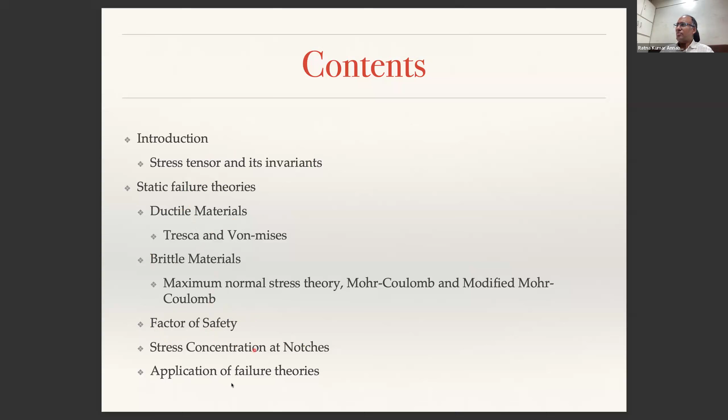So in this, we will discuss certain aspects of the concept of a stress tensor and its invariants, and how then we will define the failure theories, different types of failure theories for ductile materials and brittle materials, and then we will define the quantity called factor of safety. Then you apply these things to components that have stress concentrations or notches. And then we'll see some application of these failure theories for design problems.

Okay, so what is failure? When we say failure, what is the meaning of failure? Does it really mean the complete failure or ultimate fracture of a component, or is it not? And the second thing is, how does one define failure when you are dealing with a ductile material versus a brittle material? Is the definition of failure the same for both? So if you are an engineer, for engineering applications, what do we consider as failure?

The definition of failure itself is important, because depending on the definition of failure, we will be able to characterize, or classify, whether a particular component or system is safe to use or is not safe to use.

And then, are material properties important? Are the material properties that we have discussed in previous classes important in order to assess failure of a component? These are the questions that one needs to ask before we move on to understanding failure.

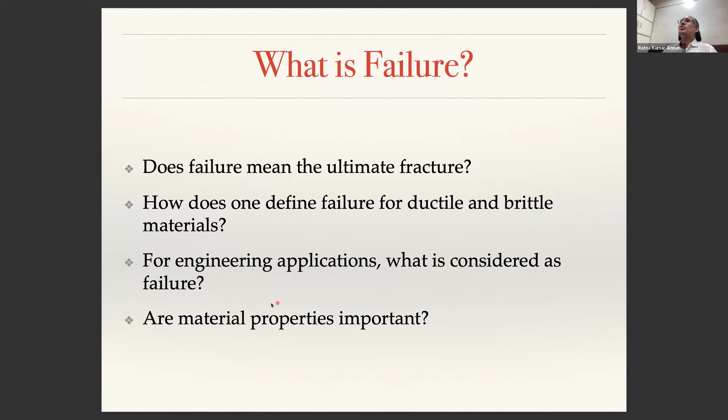First of all, we need to define what is failure. We should understand what is the meaning of failure.

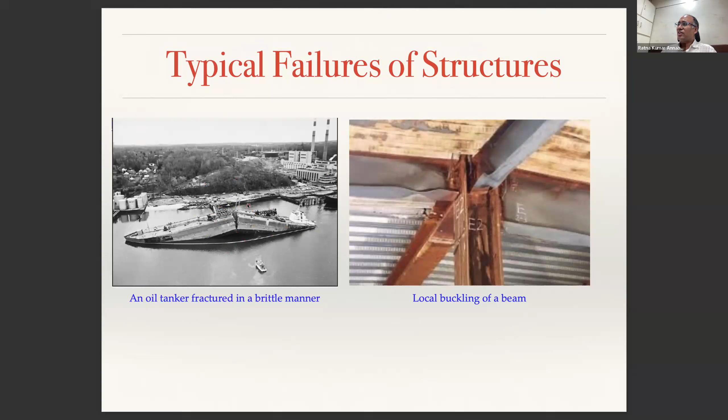So now the question is, why do parts fail like this? Why do structures fail like that? Why did this one only buckle but did not fail, whereas why did this other one actually completely break instead of giving a sign like the one on the right hand side? So the question we ask is, why do parts or components fail?

I think this is the single most important question that contributes to a rich scientific understanding of failure of materials. If we don't ask this question, why do they fail, then we probably would not have understood a large deal about the failure of components.

So from the mechanical engineering point of view, or mechanical design point of view, whenever we are talking about failure, we try to understand the concept of Mohr's circle, and from there we will talk about failure in a little bit more detail.

Okay, so how many of you are familiar with the concept of Mohr's circle? Just raise your hand.

Two. I only see 3 people. Huh? 4. I don't know how to raise a hand. Sorry, okay. So there are only 2 people. There are some people who have lowered their hands. 3 people.

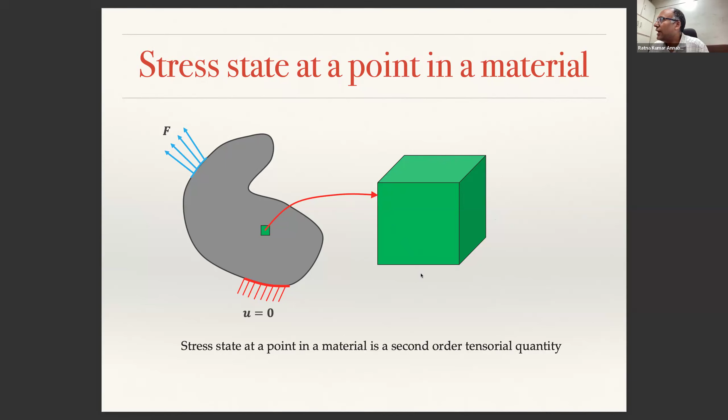This is my infinitesimal volume element. If I look at that infinitesimal volume element, I can show my stress state at that point as, for example, this is your x-axis, y-axis, z-axis. To this plane, the normal to that plane is x-axis. Can you see that? Similarly, normal to this plane is y-axis. Normal to that, the front plane, is z-axis. Is that clear to all of you? Yes, sir. Yes, sir. Yes, sir.

So now, on this particular surface, you will have sigma xx. The first index represents the normal to that particular surface on which you are representing this, and the second index is the direction in which it is represented. So this is sigma xx, what we call normal stress, because it is in the direction normal to the plane. In this plane, the plane's index is x, and this is in the direction of y. This is what we call sigma xy, and this is sigma xz.

These two components represented by green color are in the plane, that is why they are called shear stress components. So you have a normal stress component and two shear stress components. Similarly, in all the 6 faces, you can write them, and you will see sigma yy, sigma yx, sigma yz, sigma zz, sigma zx, sigma zy. Is that clear now?

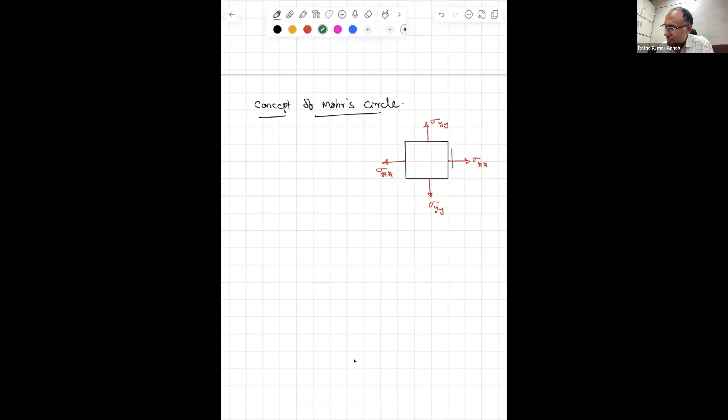We need to introduce the concept of Mohr circle. So if I take a two-dimensional state of stress, instead of drawing a cube, I will draw a square. On that, I'll show that is my sigma xx. This will also be sigma xx. That is sigma yy, that is sigma yy. And that is sigma xy and sigma yx. This is also sigma xy and sigma yx.

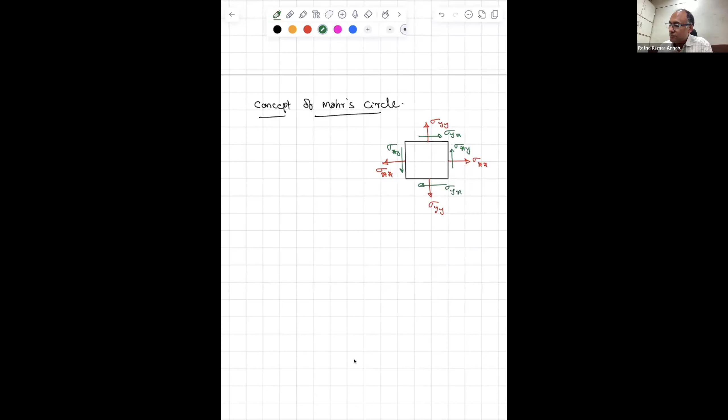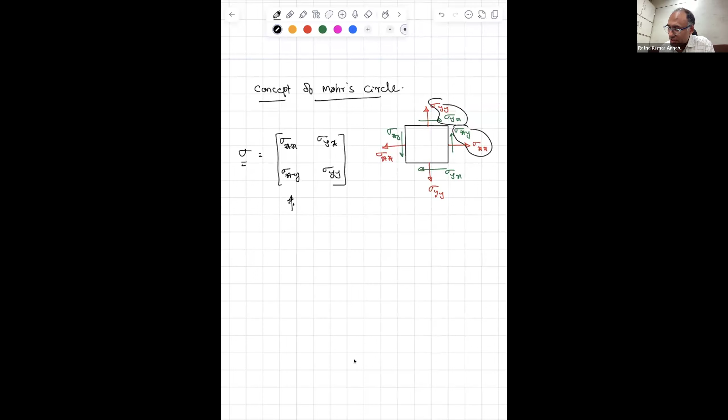So this is a two-dimensional state of stress, represented by a second order stress tensor: sigma xx, sigma yx, sigma xy, sigma yy. Maybe these two quantities are coming here, these two quantities are coming. This is called a second order tensor.

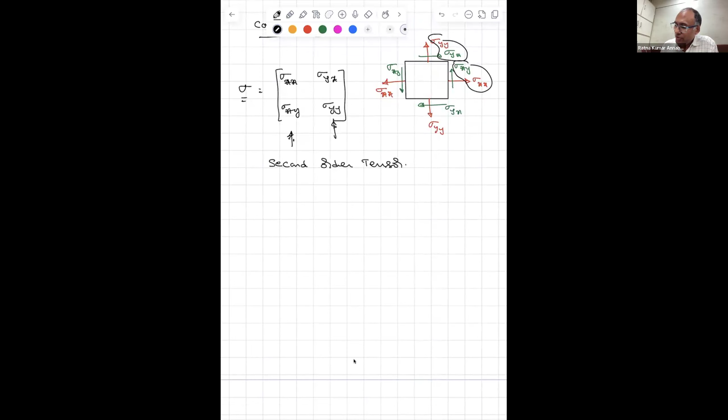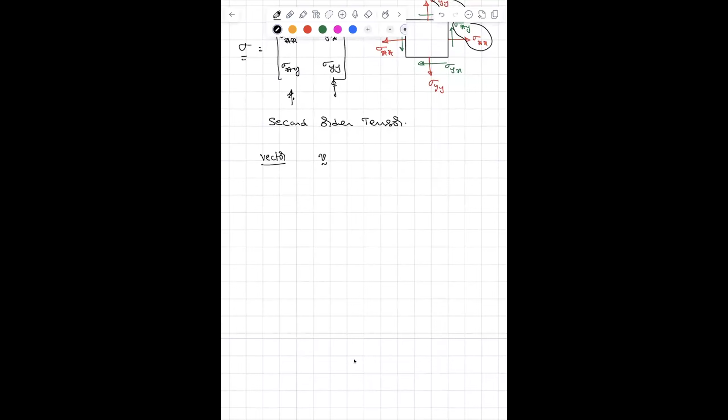What do you mean by second order? Suppose if you take a vector, how do you represent a vector? By magnitude and direction. So let us look at this. Let us say you have x-axis and y-axis. I am drawing a vector v. So how do I represent this vector v? Let us say this is how many units?

And this is 1.5 units, correct? So v can be written as 3, 1.5. Can I do that? Do you agree? So here Vx is equal to 3, Vy is equal to 1.5.

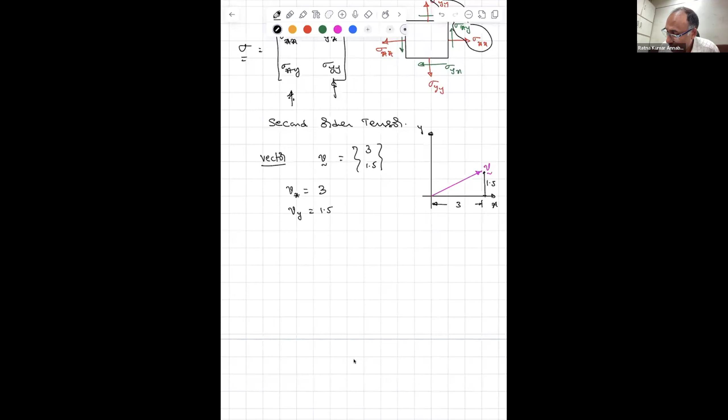That means Vx is the projection of the vector v on the x-axis. Vy is the projection of V on the y-axis. So whenever you are writing a vector, the components of the vector represent the projections of that vector onto the respective coordinate axes.

So now if you look at this fellow, V is 3, 1.5, the magnitude is what? Square root of 3 square plus 1.5 square. And the direction? Theta is equal to tan inverse Vy by Vx. That is equal to tan inverse 1.5 by 3, that is equal to tan inverse 1 by 2.

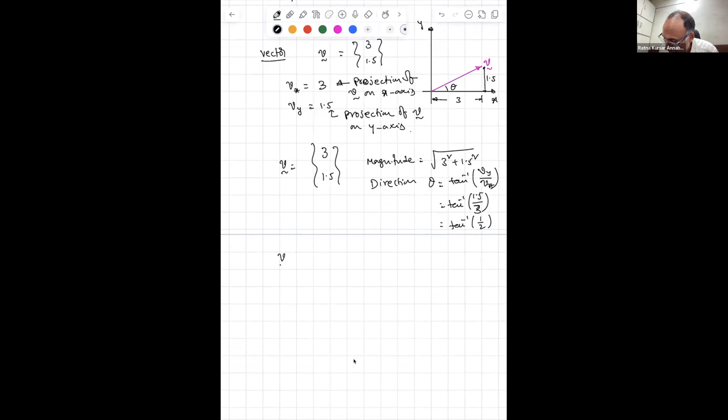Right, so that is how you represent the vector. Now there is another way to represent this vector. This vector will have how many components? 2 components here, because it's a 2D system. So you say V1 and V2. V1 is your 3, V2 is this thing. So whenever representing this vector, I could write it as V, or I could also write as Vi, where i goes from 1 to 2. Can I say that?

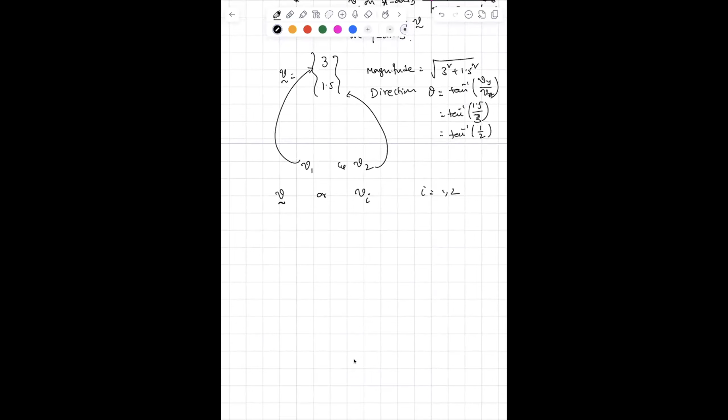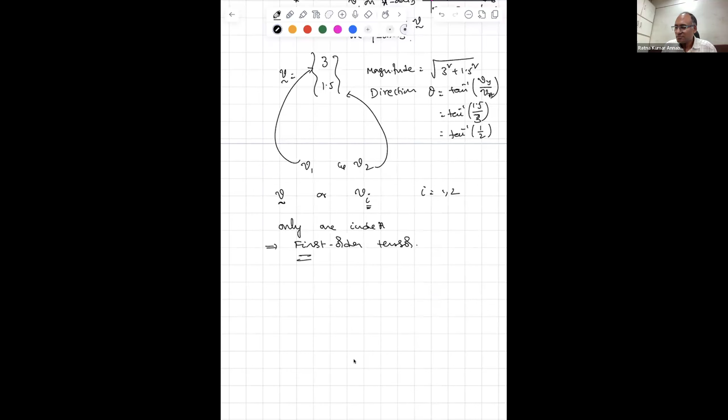Yes, sir. So in order to represent the vector, how many indices am I requiring here? There is only need for one index. That is why it is called a first order tensor, because I need only one index.

Whereas coming to a stress tensor, if I have to represent this guy, I have to say sigma 11 is sigma xx, sigma 12 is sigma yx, sigma 22 is sigma yy. Meaning the particular index value: first row first column, first row second column, second row second column, and so on. So in order to represent sigma, I could write sigma, or I could write sigma ij. Since I need 2 indices to access any element, then that is called a second order tensor.

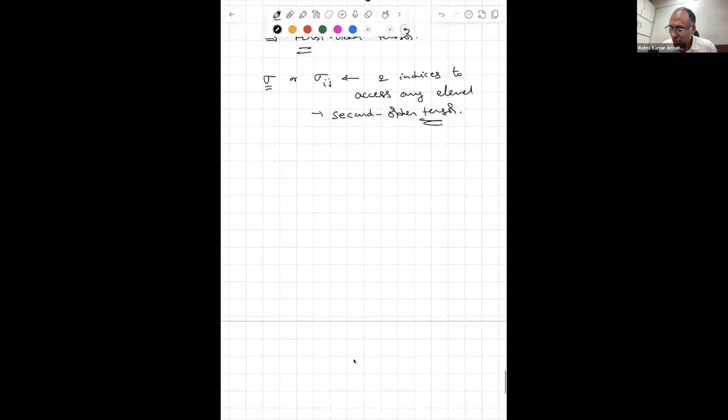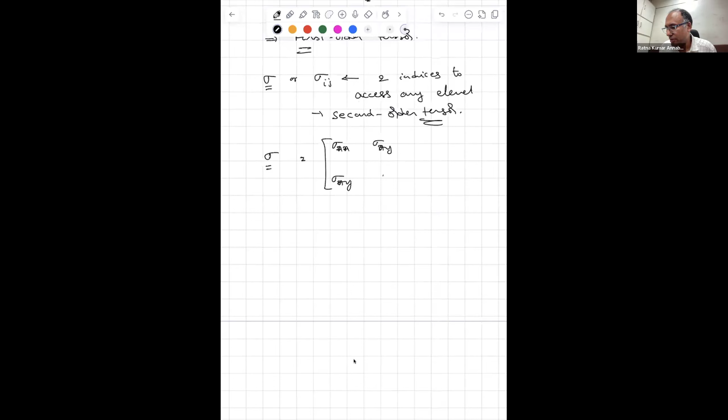Okay, so now you have sigma, which is given by sigma xx, sigma xy, sigma xy, sigma yy. Here xy have written because it is symmetric. Although we have not used that anywhere, but this is a symmetric tensor, that is why sigma xy can be written as sigma yx.

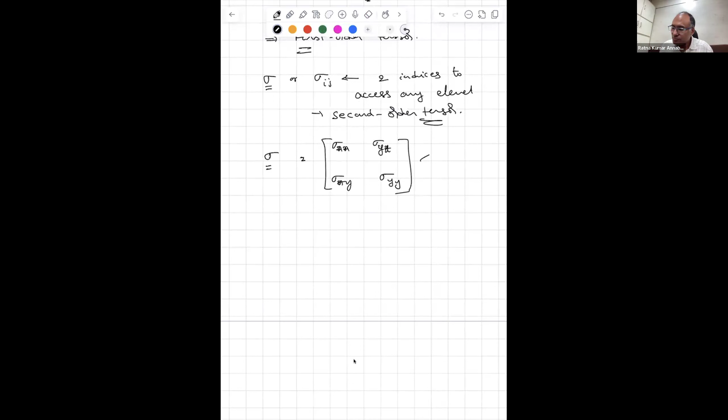Okay, now carefully observe. For this fellow, whatever we have written here, that is our x-axis and that is our y-axis, isn't it? So what is it, suppose if you look at this particular surface...

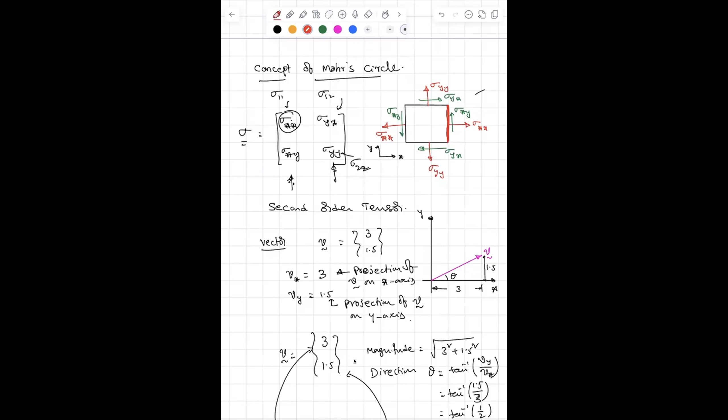What is the normal to that surface or normal to that edge? No, what is the normal vector? How do you represent the normal vector? What is the normal vector to that? X-axis, isn't it? Is the normal in the direction of the x-axis or not? Yes, sir, x-axis. So what is the unit vector along the x-axis? i.

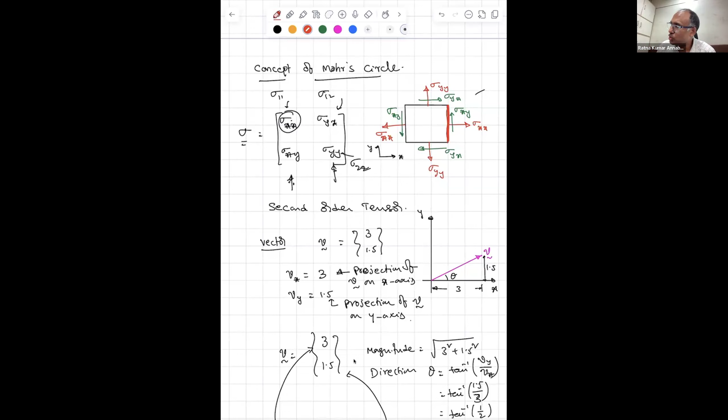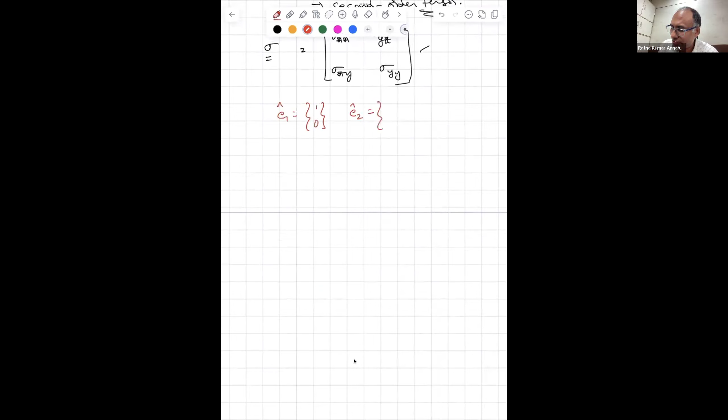Whenever I say vector, it will have how many indices, how many components? It should have, since it's a two-dimensional space, two components. So let us say the unit vector along x direction is E1 hat, that will be 1, 0. And the unit vector along y direction is E2 hat, that is 0, 1. Do you agree or not?

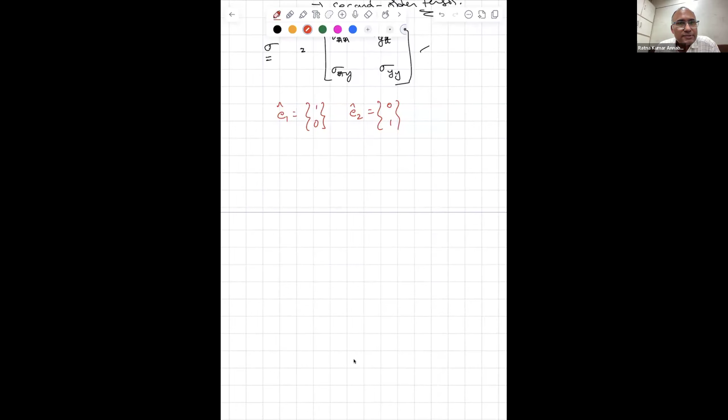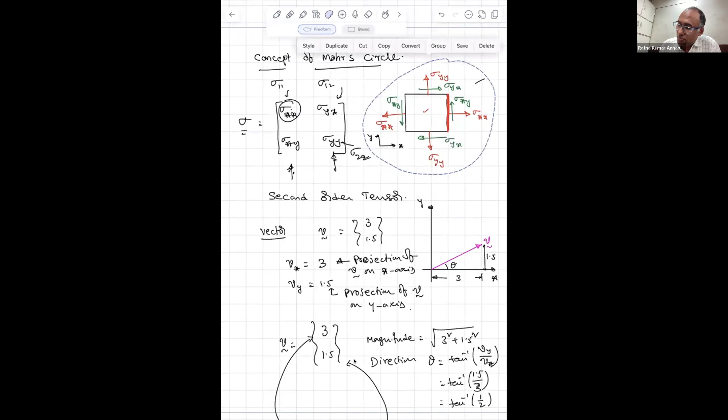Is there any question here? No, sir. Okay, now the stress state at this point. Okay, let me. The stress state that is shown on this infinitesimal element can be represented by sigma is equal to sigma xx, sigma yx, sigma xy, sigma yy.

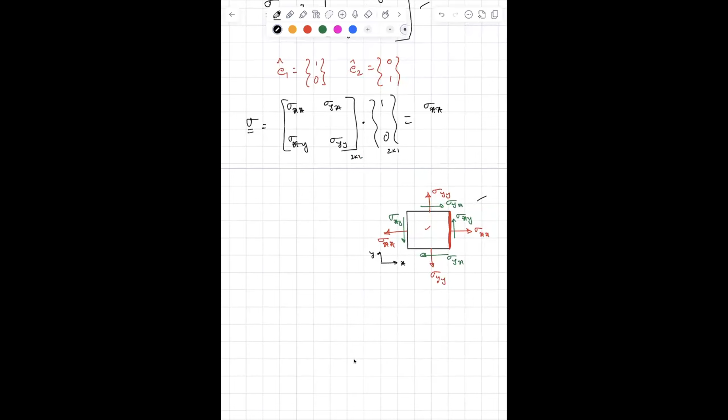And if that is dotted, this is the dot product of that with E1 hat. E1 hat is 1, 0. What will I get? Sigma xx, plus sigma xy. Is it a 2 by 2 matrix? It is a 2 by 1 matrix. What should you get? Sigma xx, and sigma xy.

What did we get? When I have taken this matrix, second order tensor, and find the projection of this vector onto a plane whose normal is this, what is that plane? That is this plane, isn't it? Because the plane's normal is 1, 0, then I am getting this, that is basically these two components, isn't it? Yes, sir, this is also a vector, isn't it?

This we call a traction vector. So the traction vector on any plane n is given by the stress tensor dotted with the normal to that plane. That gives the traction vector on that plane. T is equal to sigma dot n will give you the traction vector on that plane. Meaning, if you look at this fellow, on this plane I am plotting again that particular, I am only drawing that particular plane.

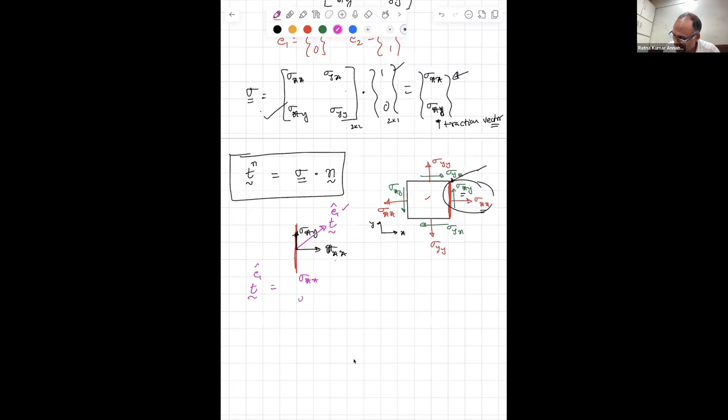E1 hat is the normal to the plane. So when you take the full stress tensor and find the dot product of that with the normal to any particular plane, that gives you the traction vector acting on that particular plane. Is that clear?

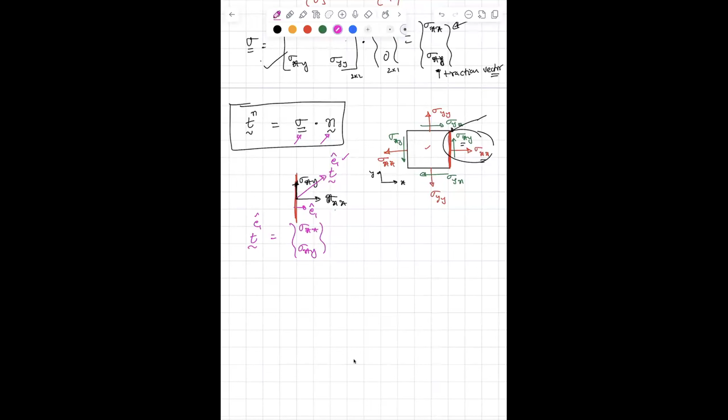Yes sir. Now, on any plane you have a state of stress which is a normal component and a shear component. If it is 2D, you will have one normal component and one shear component. Is that clear? In general.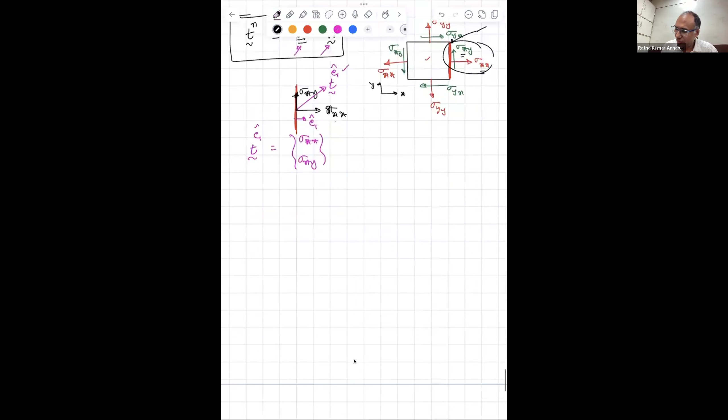Yes sir. So what your Mohr circle says is the following. You take the x-axis as the normal component of the stress, and the y-axis as the shear component of the stress.

Now, on any particular plane, you have sigma xx comma sigma xy. Agreed? So identify that particular point. Let us say that is your sigma xx comma sigma xy.

Now look at the other plane here, highlighted by the pink one right now, which is at an angle 90 degrees to the original plane. So let us say this is the state of stress at a particular plane. Now we are looking at the state of stress at another plane, which is at 90 degrees. The state of stress is sigma yy and again sigma xy. Both of them are the same.

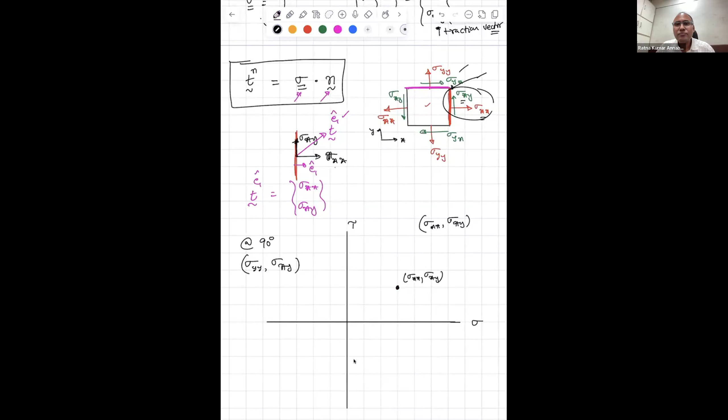So if it is 90 degrees in the physical plane, in the Mohr circle it will be 2 times theta. That means 2 into 90 is 180 degrees.

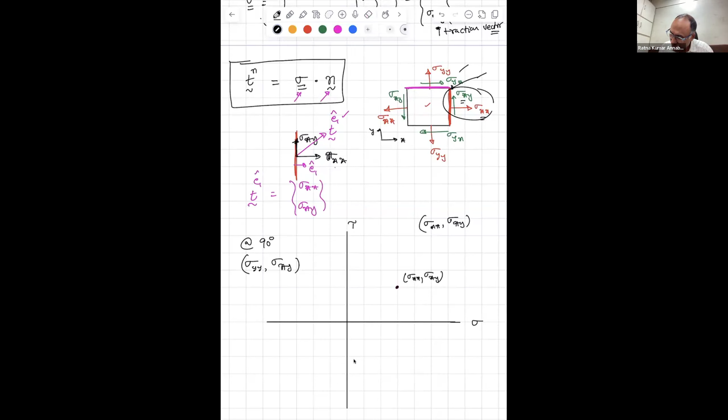So all that I need to do is, let us say this is my sigma xx. Then all I need to do is draw a line. This is sigma xy, right? And sigma yy will be somewhere, right? That is a normal quantity. So this is sigma xx, and this is sigma xy. And this is the sigma xx value. That is why you got this point.

And your sigma yy could be positive or negative. Let us say sigma yy is this for some reason. Value of sigma yy is this. Then sigma xy should be in the negative direction. Then you join a line. Then this is your sigma yy comma sigma yx.

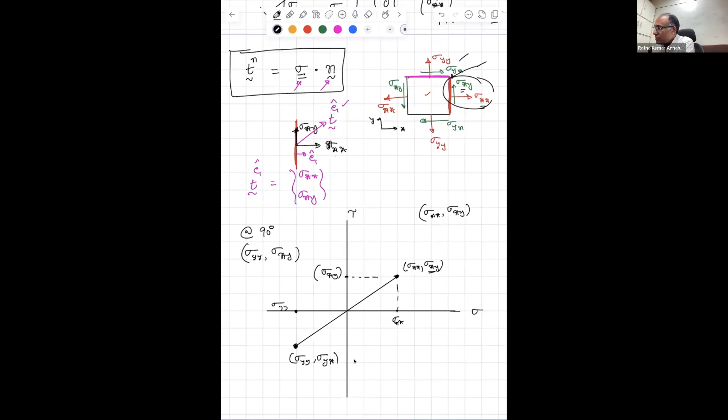You do that, then you have the stress state on one plane and the stress state on a plane which is at 90 degrees to that particular plane. You got that. Then you draw a circle connecting these 2 points, and that is your Mohr circle.

And that Mohr circle will intersect the x-axis, or your sigma axis, at these 2 points. This is what we call sigma 1 and this is what we call sigma 2. Sigma 1 is the maximum principal stress, this is called the minimum principal stress. And this is where you will have maximum shear, tau max.

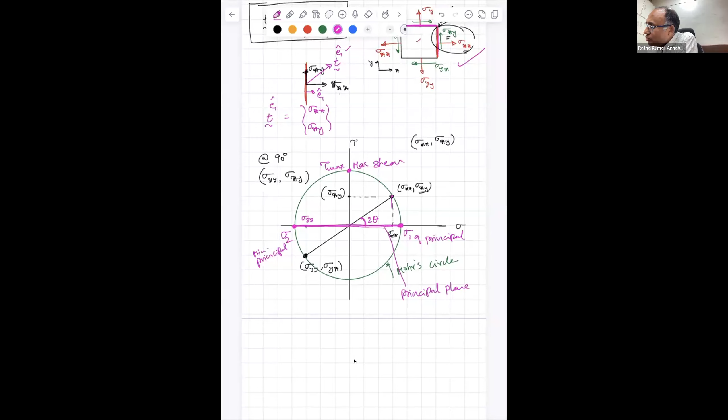Any point on this Mohr circle will represent the state of stress. So if you look at a particular point, and if the element is oriented like that, you calculate your stress state like this. But instead, if you change your orientation, that means your coordinate axis is different. Then in that plane, the state of stress can be obtained from this Mohr circle by just knowing the angle between these two. If the angle between them is theta, you choose another point at an angle 2 theta, and that will represent the state of stress at that point.

By drawing the Mohr circle, you can find the state of stress at any point without worrying about calculations. So by the Mohr circle, you can see what is the principal plane and what is the maximum shear plane. That means the plane at which shear stress is maximum will always be at an angle of 45 degrees from the plane on which you have principal stresses. Is that point clear?

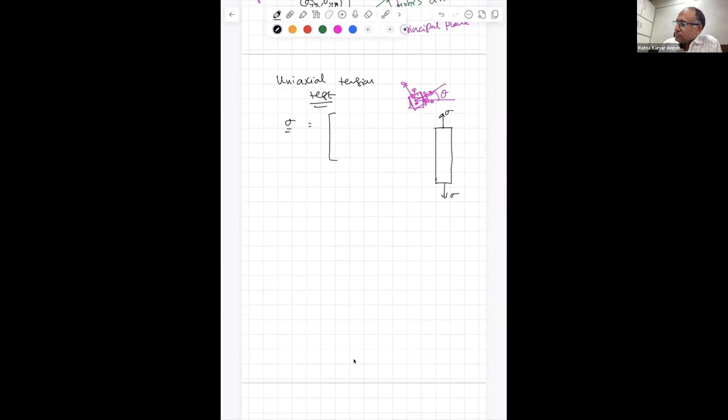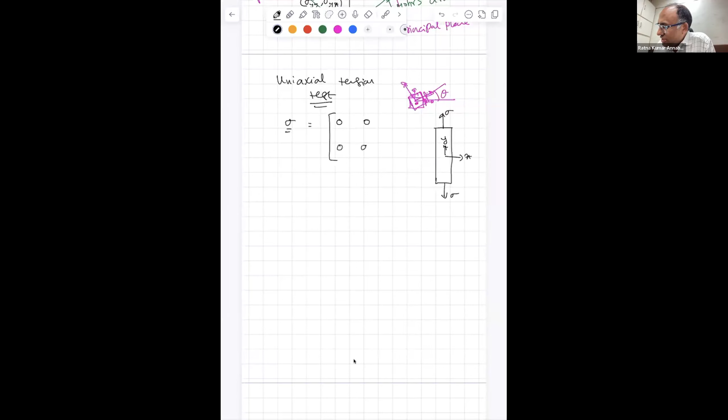Now let us carefully understand this with a uniaxial tension test. How do I do a uniaxial tension test? I have a specimen, I apply sigma, that's all. So if I write the stress tensor in that particular orientation, what will it look like? Let x-axis and y-axis be as drawn. The stress tensor is 0, 0, 0, sigma - because there is no shear stress. Agreed?

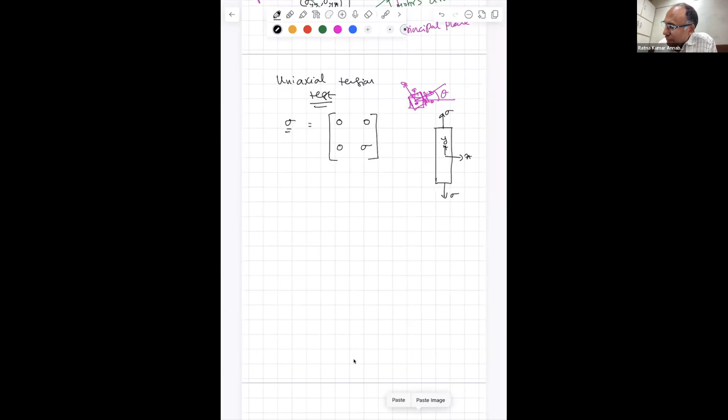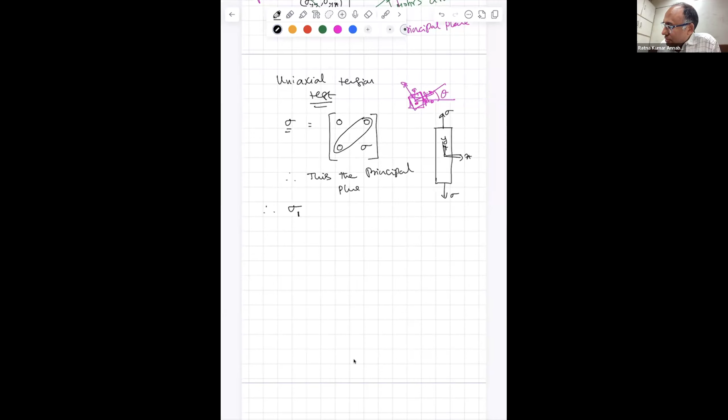Now if you carefully observe, in this particular plane the shear stress is 0. Can you see that? Therefore this is the principal plane - do you agree? So that means sigma 1, the maximum principal stress, is equal to sigma, and sigma 2, the minimum principal stress, is 0. Do you all agree with that?

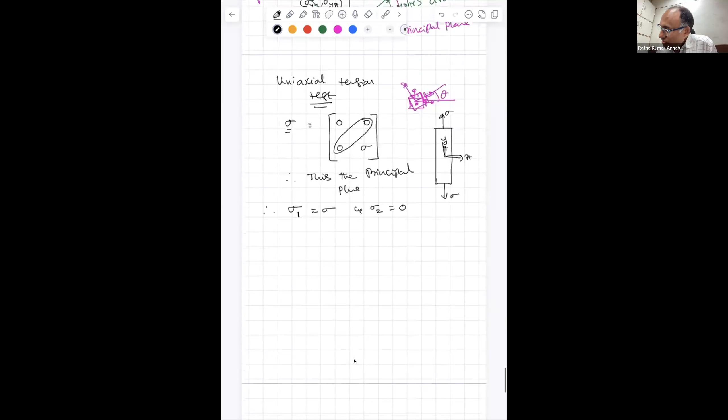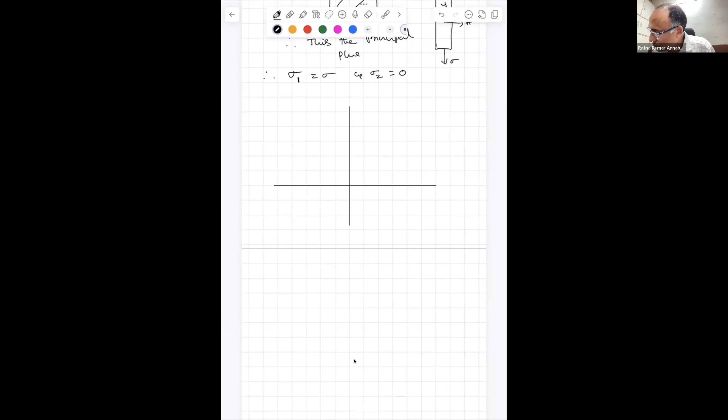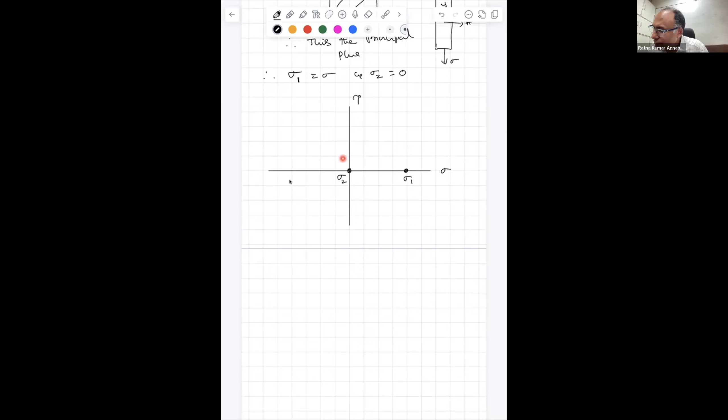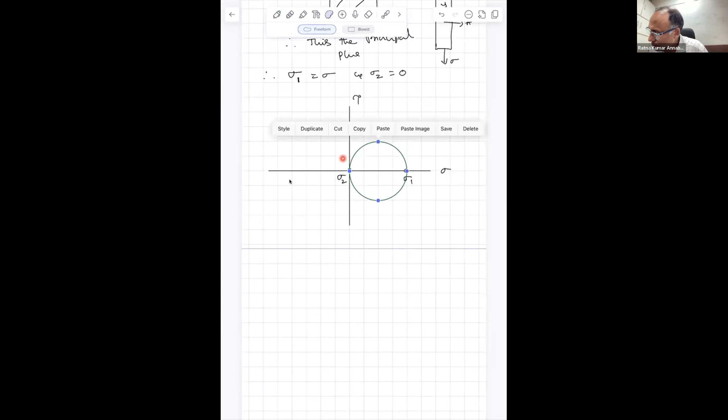Now let us draw the Mohr circle. The Mohr circle can also be drawn if we know the principal stresses directly - you identify the principal stresses and connect a circle between them. So what is sigma 1? Some value sigma. Sigma 2 is 0. This is sigma and that is tau. So this is sigma 1, that is sigma 2. So how do I draw the Mohr circle? I just have to draw a circle connecting these two points on the periphery - that's my Mohr circle.

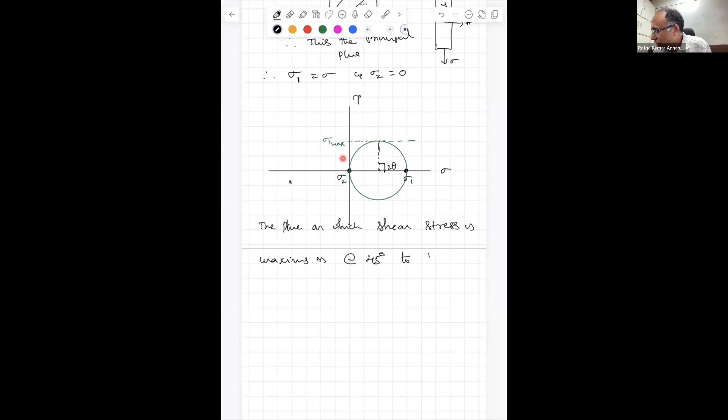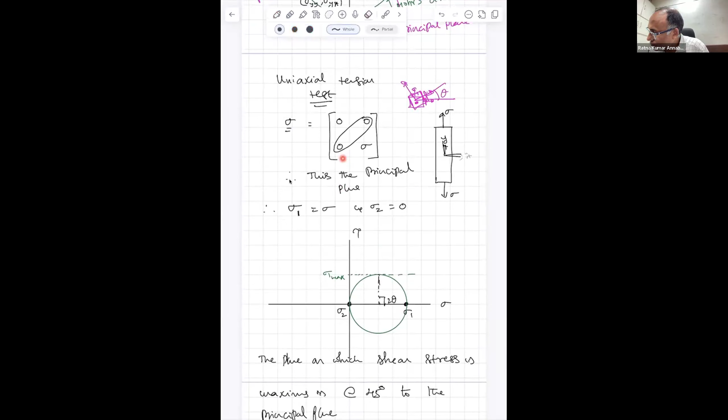So this is my tau max, at an angle 2 theta. That means the plane on which shear stress is maximum is at 45 degrees to the principal plane. So this is the plane. Drawing my x and y axis again - my principal stress is along the y direction, so the shear stress will be maximum along a 45-degree plane. Along that plane, you will have maximum shear stress. That's what it means, isn't it?

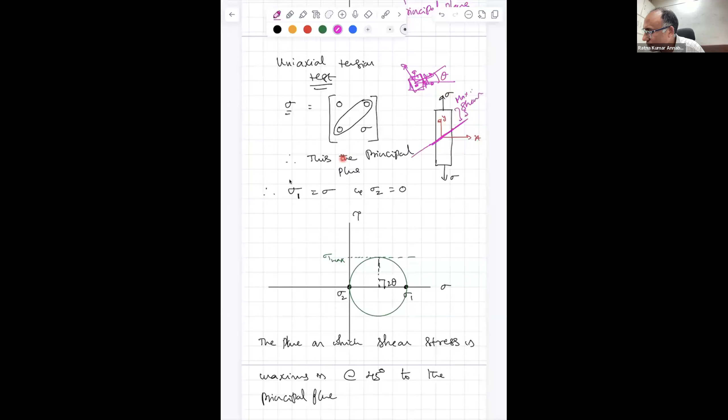Yes sir. And that is the reason why whenever you take a ductile material and apply a tension load, there will be failure happening at an angle of 45 degrees. The failure will not happen straight across. Failure happens at 45 degrees because the shear stress is maximum there. We will see why shear stress plays a role for a ductile material later. But the 45-degree serrations you see on the fracture plane are because of that.

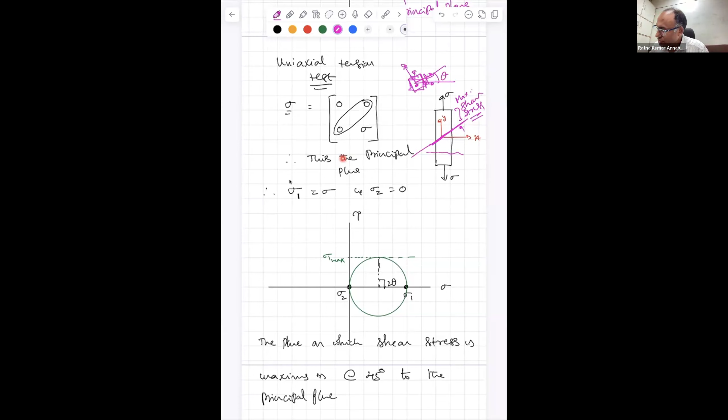So this is the Mohr circle for uniaxial tension. What this basically tells us is that although in the material I'm applying pure uniaxial tension, there are planes oriented at an angle to the principal stress plane which will have some shear developed on them. Macroscopically I'm only applying tension in that one plane, but other planes experience shear. That is what the Mohr circle is explaining to us very neatly.

If you are doing only pure shear, like torsion, pure shear implies the principal stresses are opposite signs. Sigma 1 is equal to minus sigma 2, and minimum principal stress is 0. So let's say they are opposite sign, or minus sigma 2. That means if this is your sigma 1, that will be your sigma 2. Then if you draw a circle, you will have this as your sigma max, tau max, shear stress, maximum shear stress.

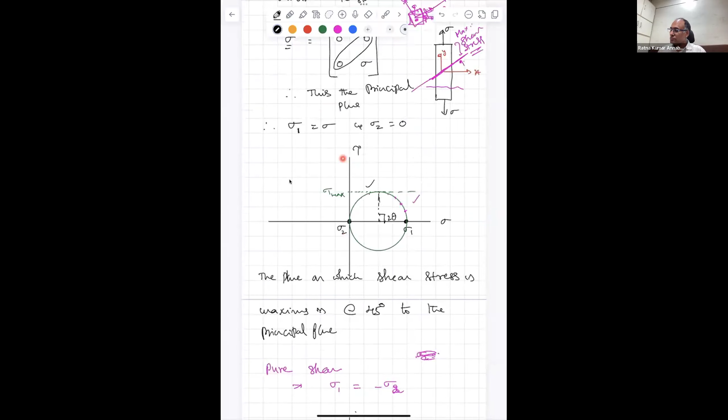Suppose if you look at this, is there any point where you have pure shear scenario? What do you mean by pure shear? At that particular point, your normal stress has to be 0 and only shear stress should exist. There is no such point. So that means when you are applying uniaxial tension, you will have simple shear, but you will never have pure shear.

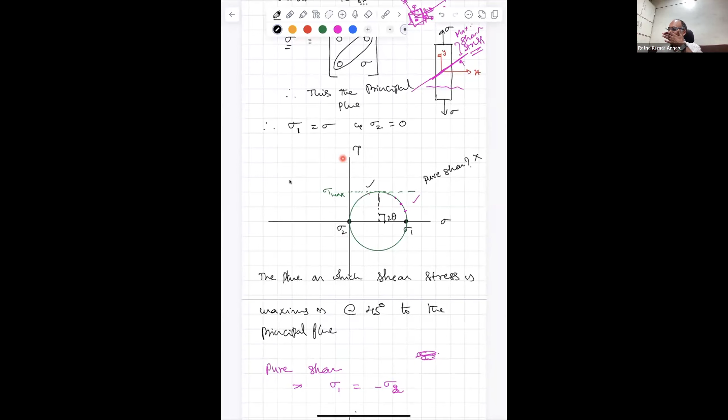By looking at the Mohr circle, you can answer all these questions, you can make certain observations about the behavior of the stress state. Any questions?

Sir, if we take into account Poisson's ratio, you will also have a component in the other direction, right? No, we are only talking about the two-dimensional state of stress. Whenever you have a 3D state of stress, then that comes into picture, but that we are not looking at right now. We will talk about that.

Hello? You're audible. Can you see the screen, right? Yeah, yes sir.

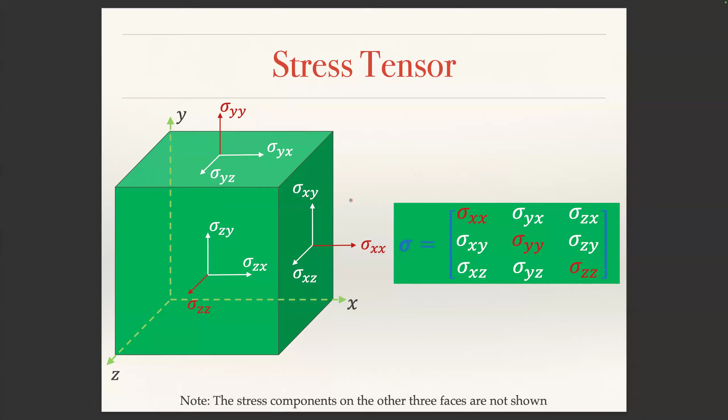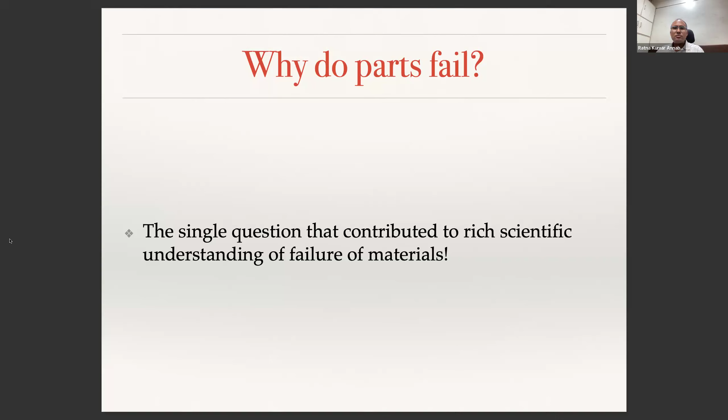It is something you would have learned in your B.Tech. Now, how do you draw Mohr circle for 3D? Whenever you are dealing with a three-dimensional state of stress, you will have three principal stresses instead of two. That is sigma 1, sigma 2, and sigma 3. When you had only two principal stresses, what did you do?

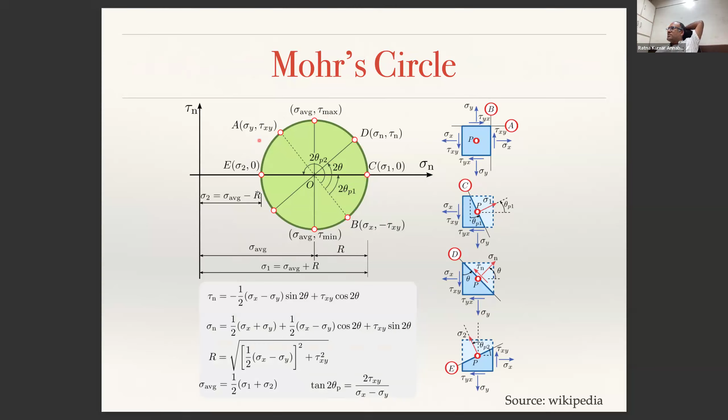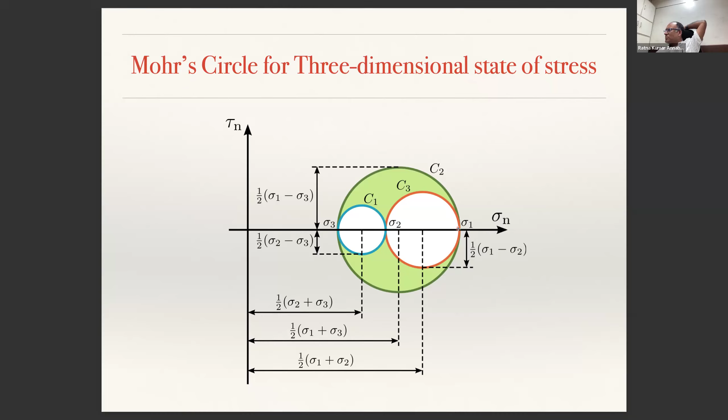Depending upon the state of stress, we will be able to figure out what kind of stress state you are going to have at various orientations. Here you can see the maximum shear stress will be sigma 1 minus sigma 3 by 2, where sigma 1 is the maximum principal stress and sigma 3 is the minimum principal stress.

Now, if you are doing a static tensile test, in general, the ductile materials are limited by their shear strength. Why? Whenever we are talking about failure, for a ductile material, the failure is defined by the onset of plastic deformation, because once plastic deformation begins, the component is not delivering what it is functionally supposed to deliver - there should not be any plastic deformation in the material. So when plastic deformation onsets, that is when you consider a ductile material has failed.

How does plastic deformation begin? What is the mechanism for plastic deformation in a ductile material? Shear - dislocation motion. For a crystalline material, dislocation motion represents plastic deformation. How does dislocation motion take place? Dislocations move under shear, that is why ductile materials are limited by their shear strength. Whereas in brittle materials, there is no dislocation motion, and hence failure is represented by complete fracture - the atoms should be separated from one another. That is why brittle materials are limited by their normal strength.

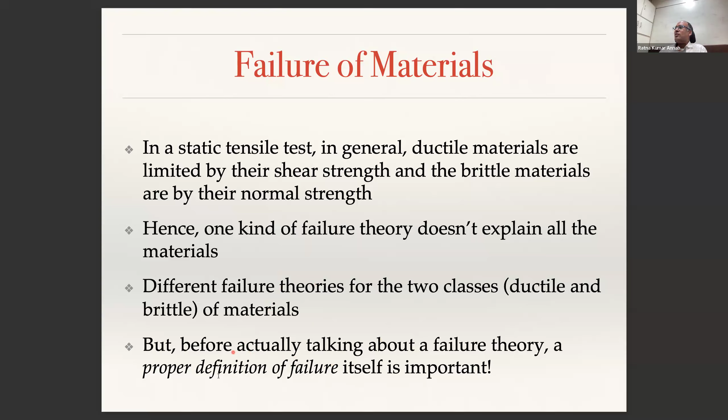So we know the mechanisms are different, and hence you have to develop different failure theories. That is fine. But before we actually talk about a specific failure theory, we need to develop a proper definition of failure, as we were discussing.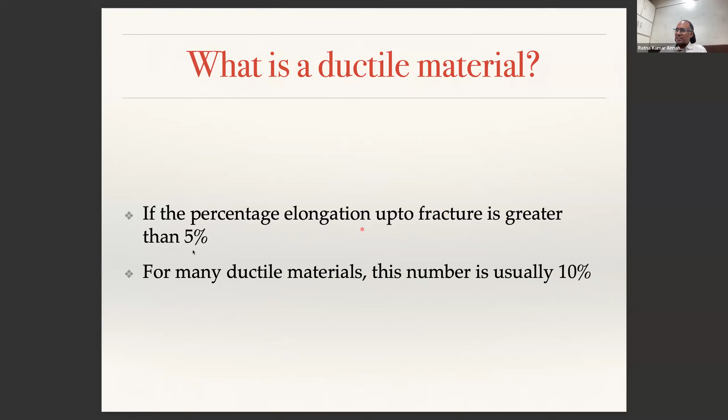A material is considered a ductile material if the percentage elongation up to fracture is greater than 5%, and in some materials it is up to 10%. That is how you define a ductile material.

So if you are talking about a component, it can be considered to have failed if it yields or plastically deforms, leading to improper functioning. In some cases, the component may fail by fracture. As we discussed, both are failures, but the mechanisms are different. And in addition, whether this failure, by yielding or by fracture, is happening because of static load or varying load, all these things will determine how we talk about failure in a material.

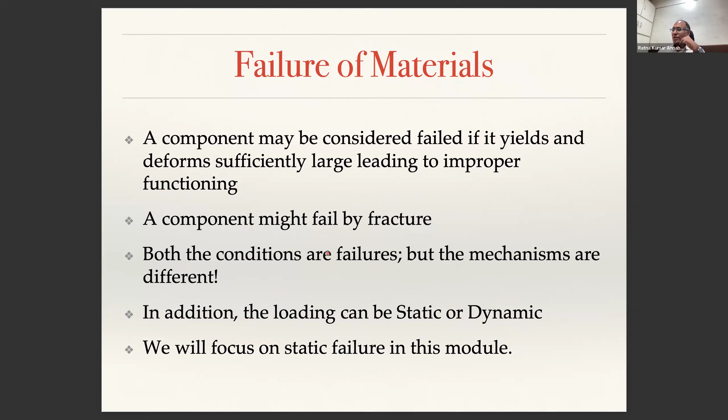As we have discussed, we will first focus on ductile materials and we will only focus on static failure in this module. So ductile materials fail by fracture if loaded beyond the ultimate tensile strength. But most machine components made of ductile materials are considered to have failed if they cross the yielding or plastic deformation point. The yield strength of a ductile material is much less than the ultimate tensile strength of the material.

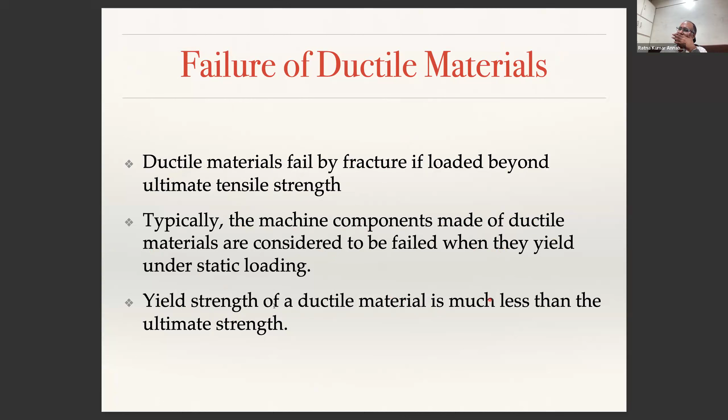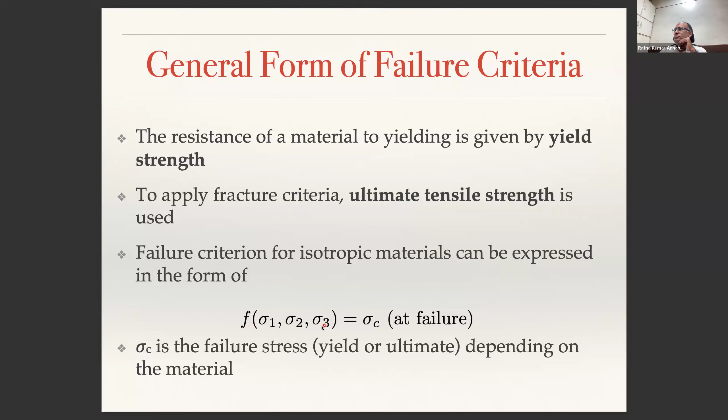Now the question is, why should I write this functional form as a function of sigma 1, sigma 2, sigma 3, the principal stresses? Why not as something else? You could write it in something else, but the idea is that a valid failure criterion should result in the same outcome independent of the choice of coordinate system.

All right, so I think I will stop here today. Well, let me spend 10 more minutes driving this point.

So why is the failure criterion written in stress space, principal stress space? I will talk about what we mean by writing in principal stress space in tomorrow's class, next week's class. But a valid failure criterion should be independent of the coordinate system you are choosing. What do I mean by that? That becomes clear in the next class.

So in order to ensure that it is independent of the coordinate system, we are writing F in principal stress space because that's an invariant quantity. What is an invariant quantity? I will talk about it in the next class.

When you plot this function in the principal stress space, it looks like a surface in the principal stress space, and that surface is called the failure surface. Each failure theory that we are going to talk about only differs from the others by this functional form that you are using. The way you write the function decides what the failure theory is, so different failure theories are basically different choices for the mathematical form of the functional.

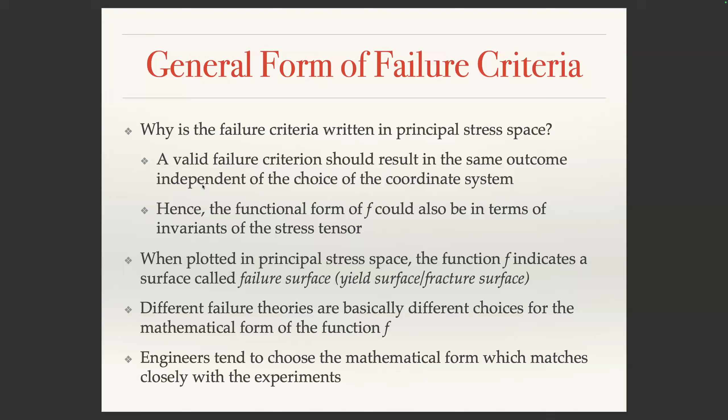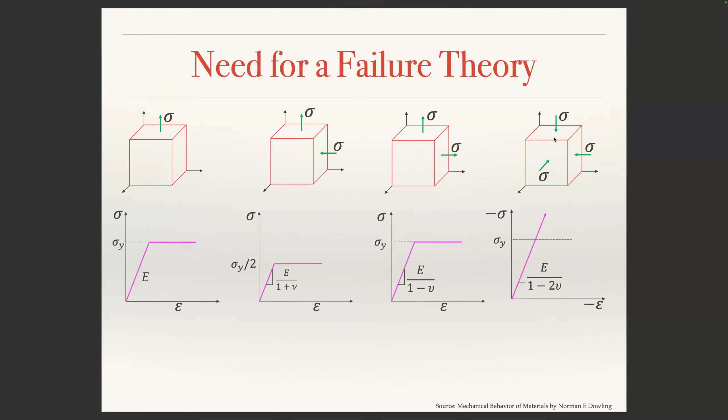In one of the slides back, you showed a picture with all three compression loads. Why is the stress and strain shown in the negative direction? Yeah, because there is compression—I showed compression instead of tension, that's all. So both strain and stress are negative. Okay, professor, thank you. Bye. Thank you.